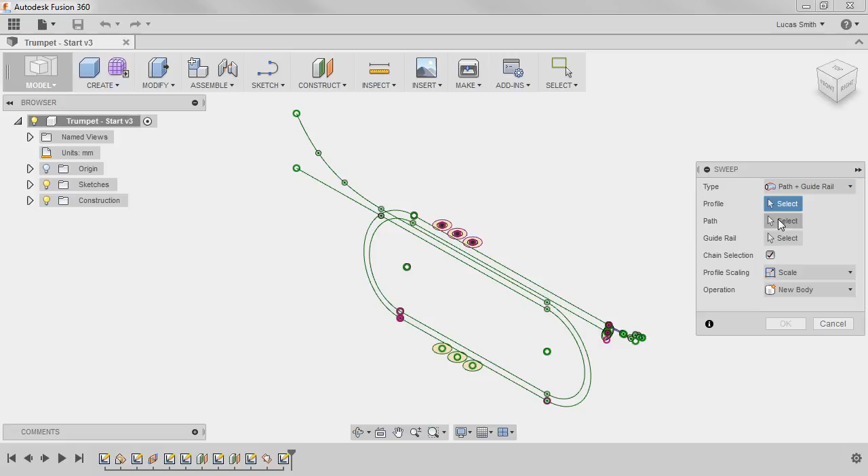I'll enable the sweep command from the Create drop-down menu and set the type to Path plus Guide Rail, so I'll be able to create both the pipe and bell in a single feature. I first need to select the profile to sweep, so I'll zoom in on the small circular profile and select the outer ring.

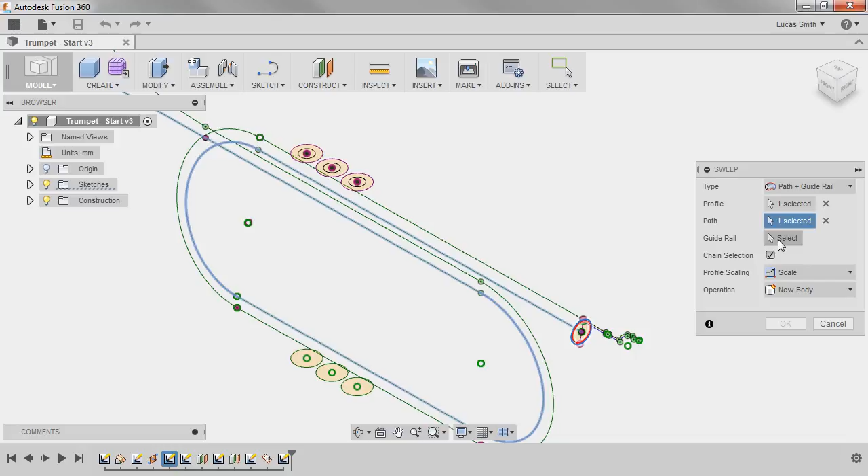I'll zoom back out, switch the selection to Path, and select all the line segments stemming from the center of the ring. Finally, I'll switch to the guide rail selection and select the offset lines.

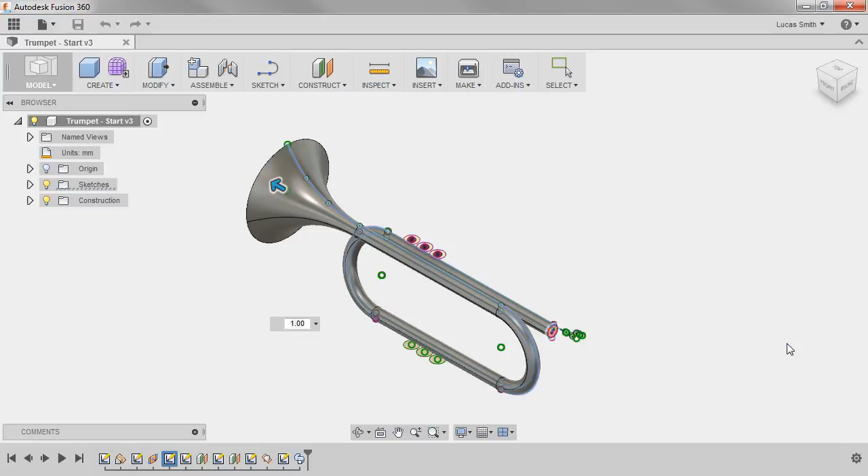To complete the sweep, I'll leave the distance at 1. Make sure the profile scaling is set to Scale and the operation is set to New Body. Then click OK. With the body done, I'll create 3 keys with 2 extrude features, each using a single sketch with multiple profiles.

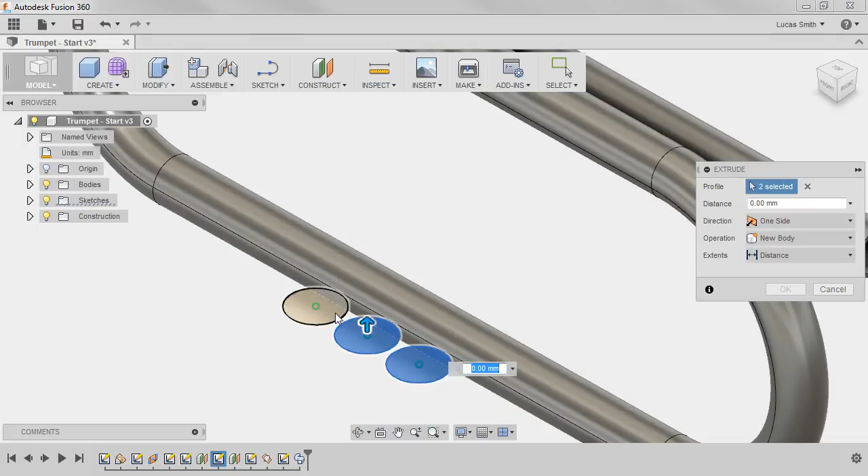I'll enable the extrude command with the E hotkey and select all 3 of the lower circular profiles. I'll set the distance to 185 millimeters, switch the operation to Join, and click OK to add the key cylinders.

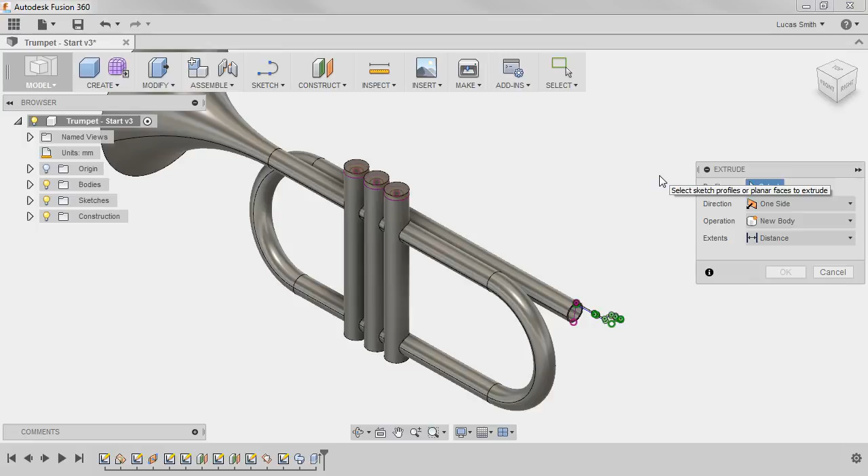I'll need to thin the keys at the top to give them the proper look, so I'll gesture straight up to enable the Repeat command and access the Extrude command once again. In order to line the cuts up, the sketch for the cuts was made by projecting the bottom circles onto a new plane and offsetting them inward.

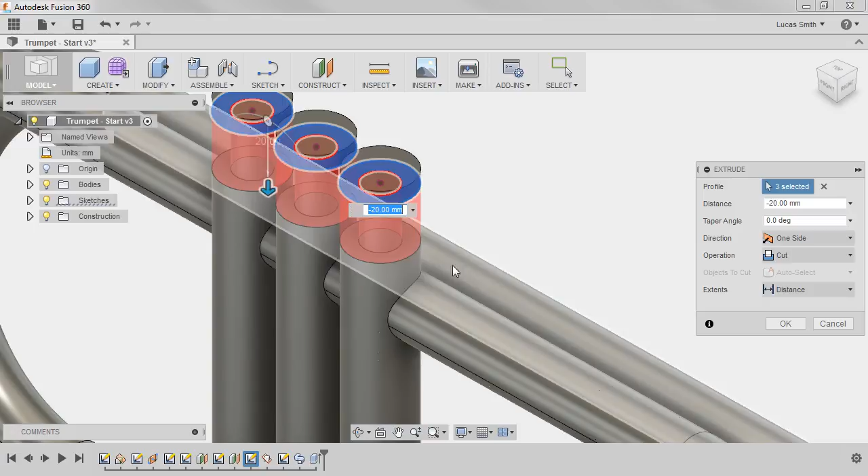I'll select the 3 ring profiles and pull the drag handle down 20 millimeters. I'll make sure the operation is set to Cut and click OK to finish the keys.

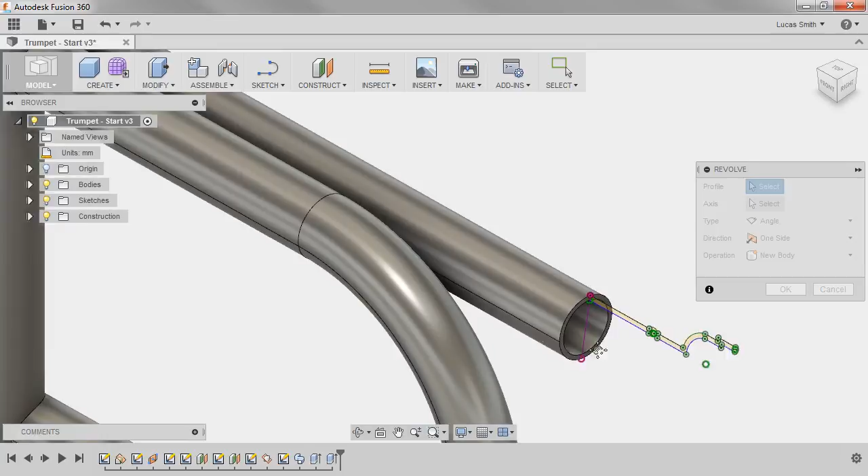The final step is to create the mouthpiece. I'll use a revolve this time, so I'll enable the command and select the mouthpiece sketch profile. To make sure the revolve matches the main pipe, I'll show Sketch 7, the sweep path sketch, from the browser, and select the horizontal path as the axis.

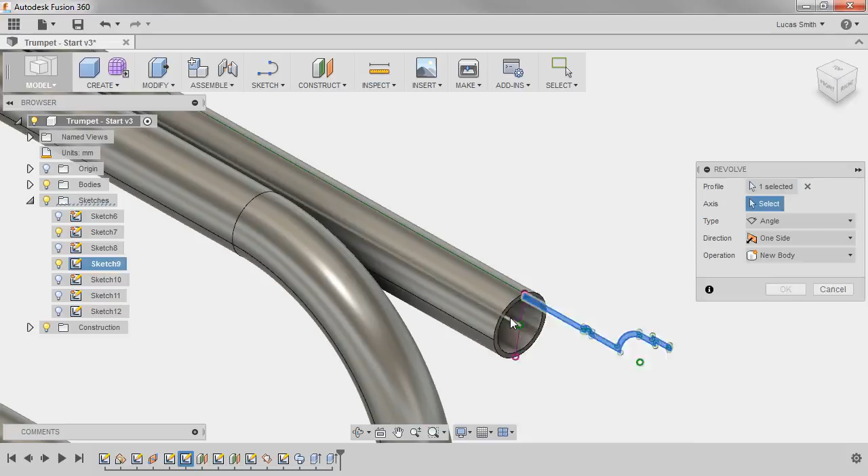Since the mouthpiece will be using a different material, I'll set the operation to New Body and click OK to finish the feature. The body is complete, but in order to finish the trumpet, I need to apply materials to the bodies. I'll right-click on a body in the browser and select Physical Material to bring up the Physical Material dialog box.

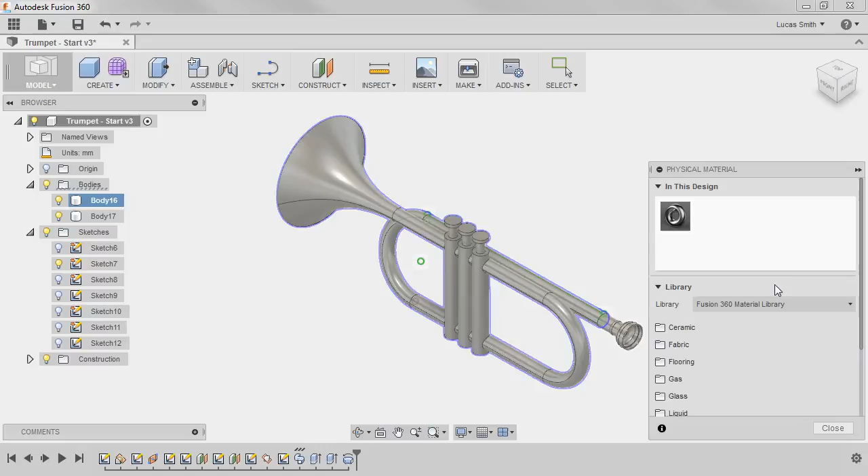I'll expand the Metals folder and find the brass material. I'll drag the material onto the main body. Then scroll down and apply the silver material to the mouthpiece.